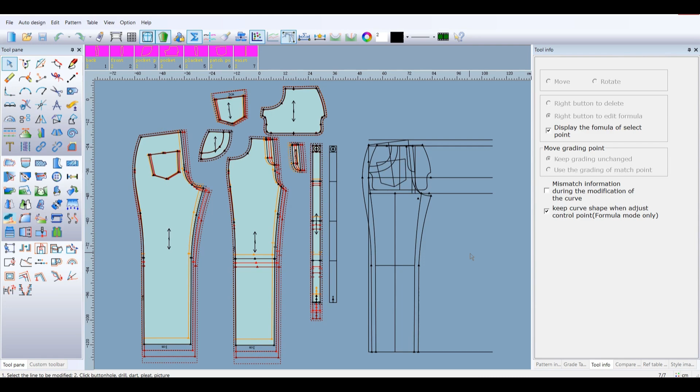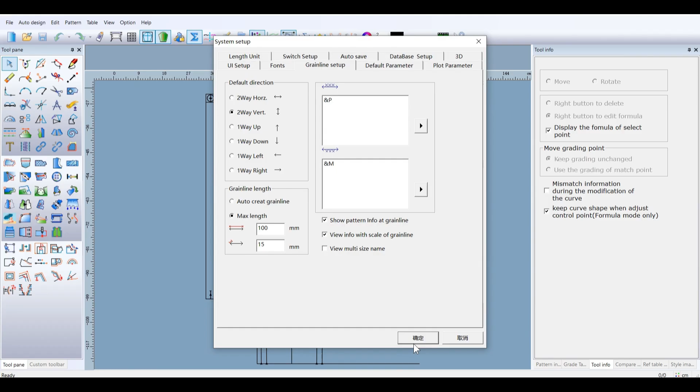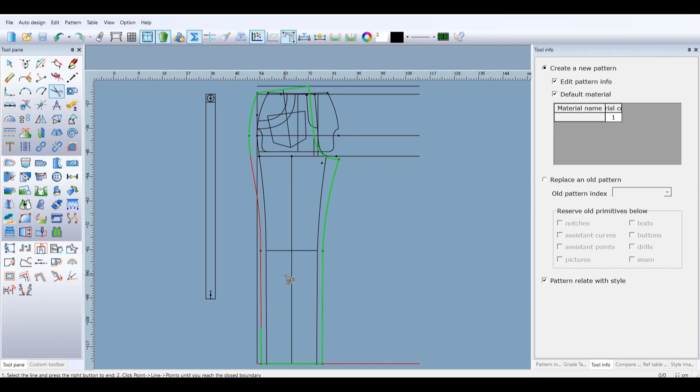I can left-click the line or box select lines. Right-click on the line in sequence. The lines change color. Right-click to make pattern, and the cursor shape changes. Now select the auxiliary lines.

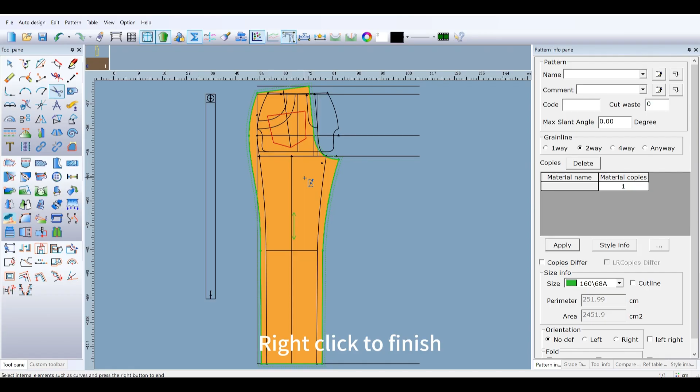Right-click to finish. Move the mouse over the pattern and click the space key. The cursor shape changes to a hand. Drag the mouse to move the pattern. Right-click to end. This is the back pattern.

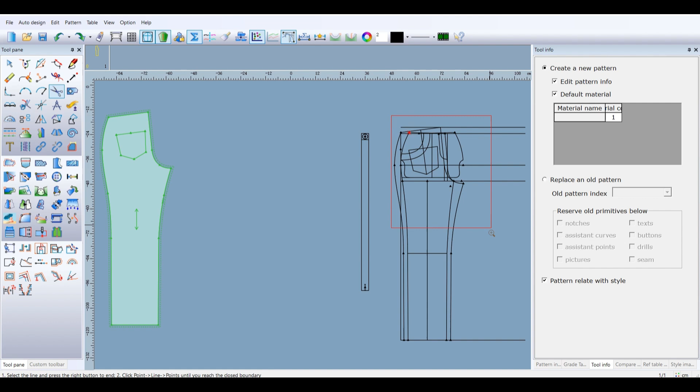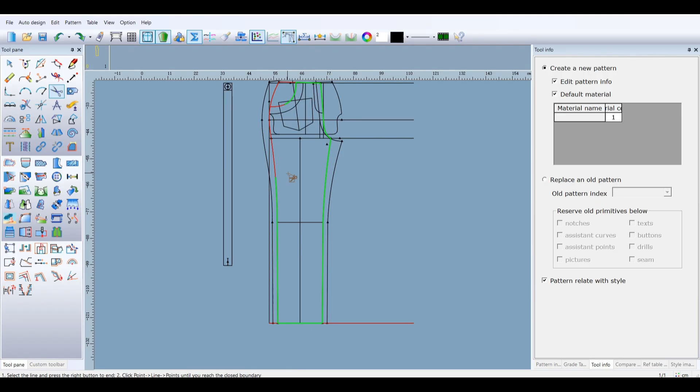Make the front pattern now. Left key to select lines in sequence. Right-click to change the cursor and select the auxiliary lines.

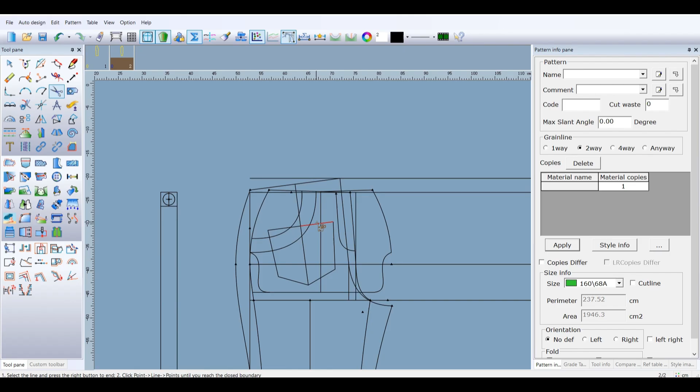Move the pattern. Make the pocket, placket, and waist patterns. Extend here.

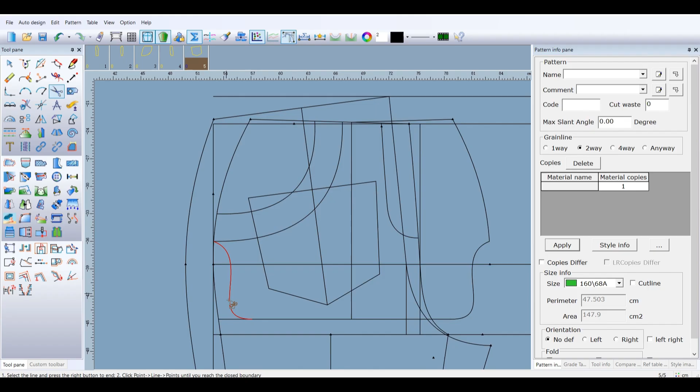The pattern is now finished. I can open the size table to change the pattern board color.

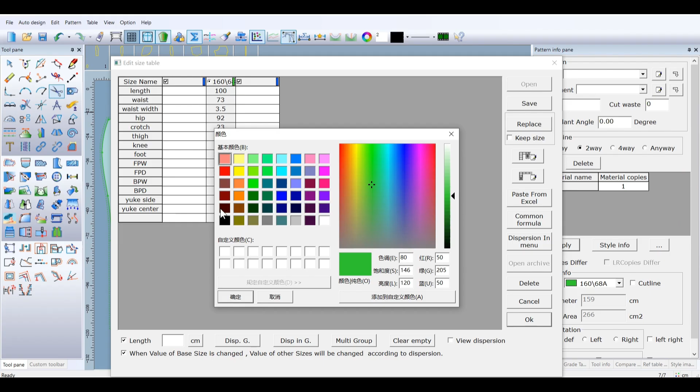Use the grainline tool to change the grainline. I can right-click on the grainline to change direction, or left-click to points.

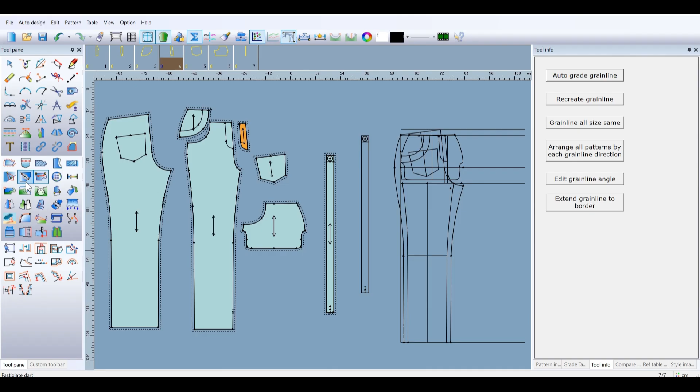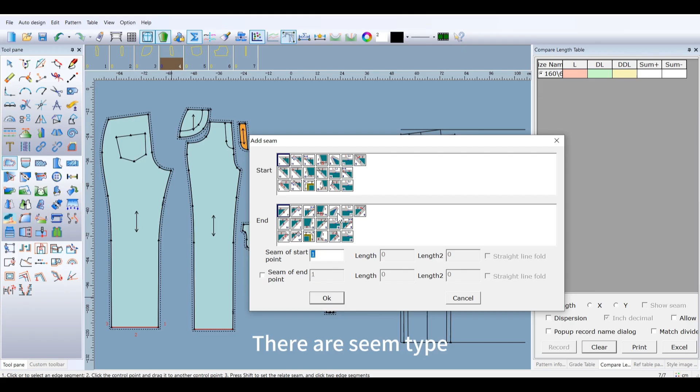Use the seam tool to edit the seam. I can click F7 to show or hide the seam. Box select lines and right-click to show the dialog. There are seam type, and there edit the number.

The seam is added. Add the notch now. Use the notch tool. Right-click the line or points.

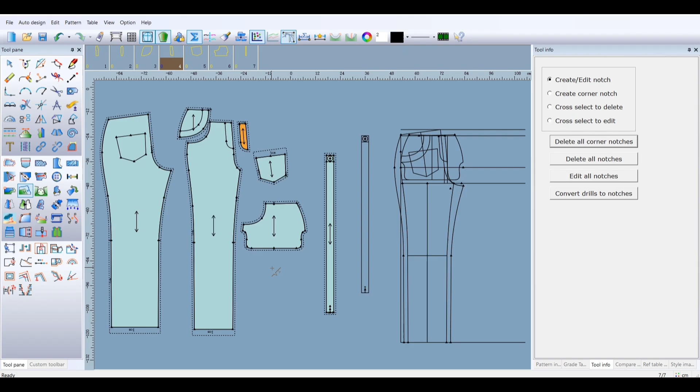Edit the piece information. Double left-click the piece in the pattern list to display the pattern info bar.

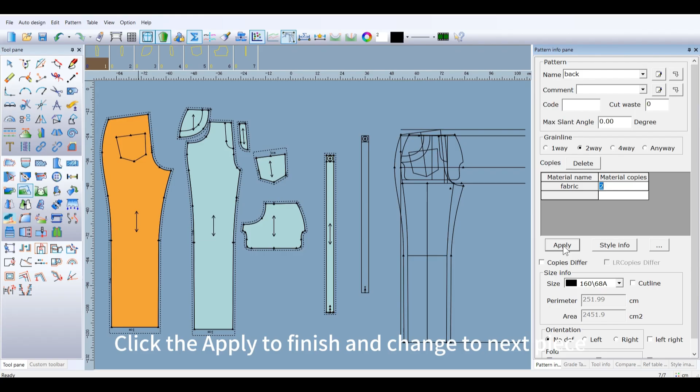Edit the piece name, material, copies. Click the Apply to Finish and change to Next Piece. Edit all pieces information.

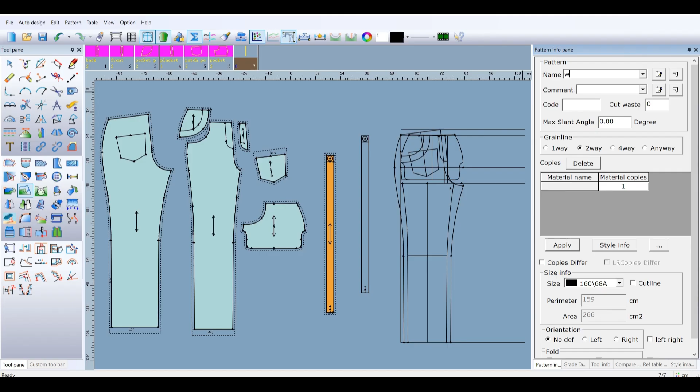The pattern is completed. I can add size inside the table to grade the pattern.

Add size here. Right-click on the number to select a dispersion number. Also, I can write a dispersion number here. Unclick it.

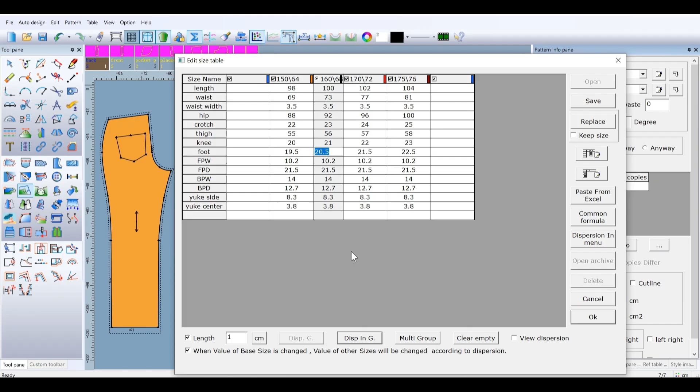OK. The pattern has been graded.